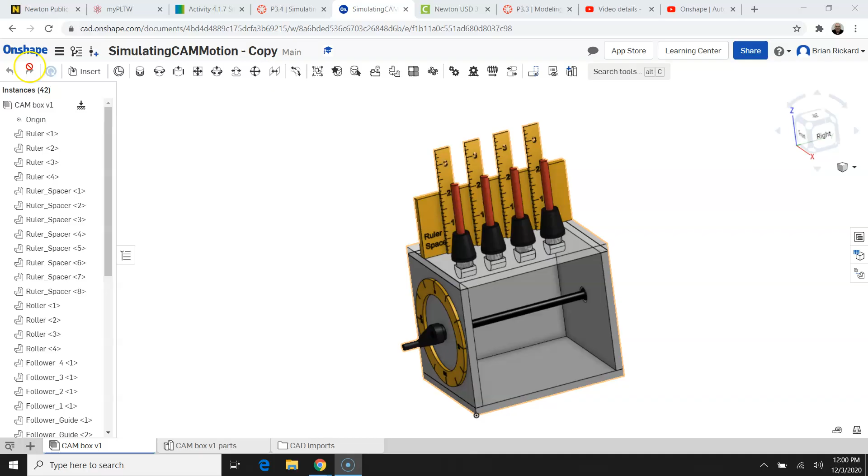How to import your cams into the Automata assembly. So we have our Automata box here.

If we just go to Insert, and then click on Other Documents, and go find the parametric cams that you created, they should pop up, and you can go ahead and find those and insert them into the document.

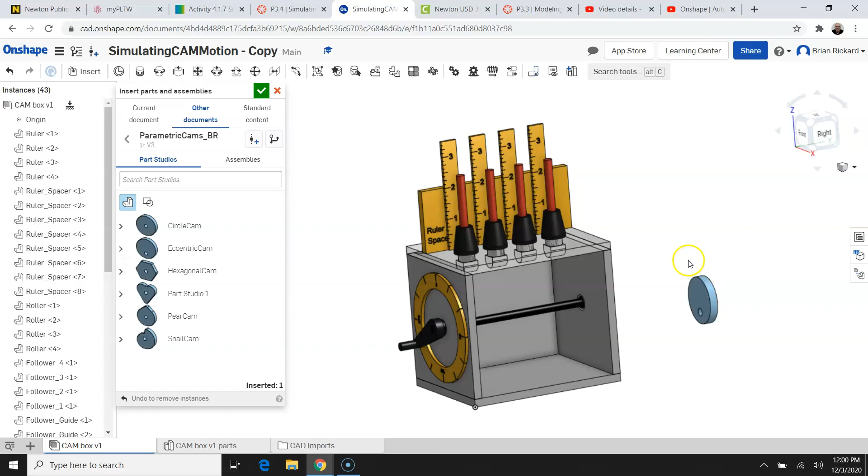So once you have your cam inserted into the document, we're going to want to put it on the axle so we can do some testing with this setup here for our Automata box.

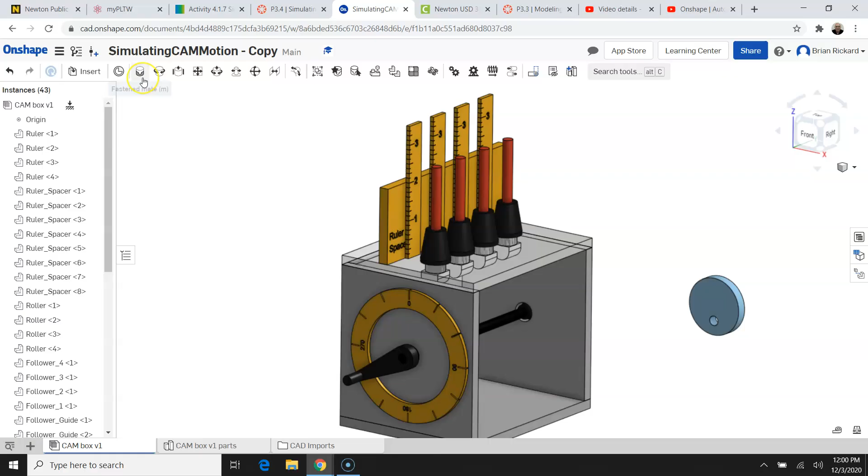So the first thing we're going to want to do is fasten our cam to the axle. So I'll go ahead and get a fasten mate. I'm going to select the circle that represents the hole on my cam, and I'm going to come over here to the axle and select the actual axle.

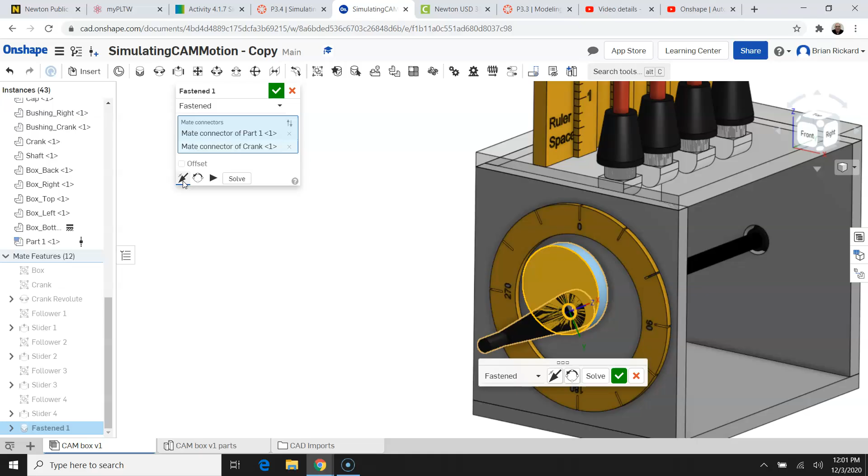Now depending on how your cam comes in, you might need to reverse the direction. Mine came in correctly. Now we're going to need to offset that cam so that it goes right below this follower guide and follower rod.

So I'll click offset, and I'm going to offset that negative 1.25 inches in the Z direction. You can see that it moves the cam directly underneath the follower, which is what we want.

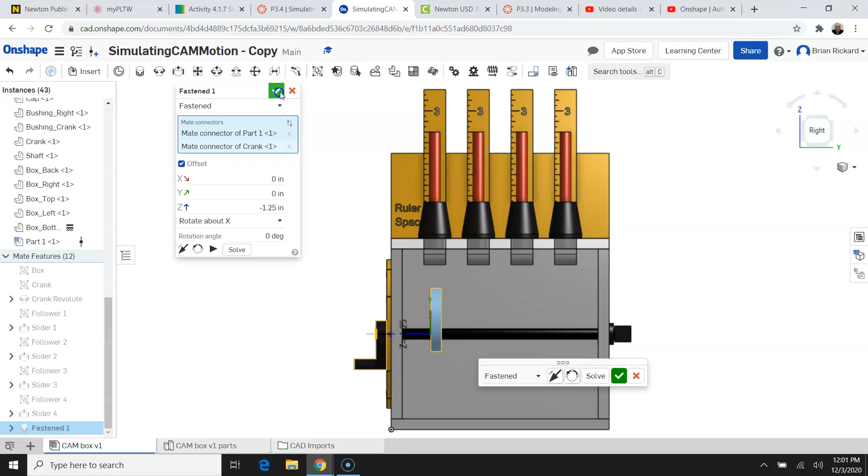The next step is to go ahead and attach the follower guide to the cam so that when we spin the crank, our follower is connected to the cam. And to do that, we're going to use a tangent constraint. Up here is the tangent mate.

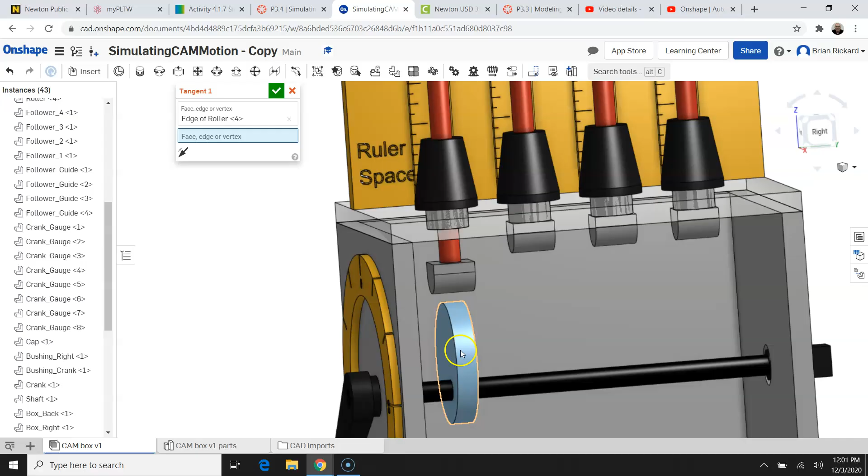I'll go ahead and click that. I'm going to click the outside edge of the roller, and then I'm going to click the surface of the cam. When I do that, it makes those two, the edge tangent to that surface.

So then when I spin my cam, or spin my crank, I can see how the cam moves within the box. So I want to show you one of the cams with sharp edges instead of smooth edges.

So we're going to look at the hexagon cam. I'll go ahead and click to insert another document. I'm going to go to my Onshape and find my parametric cams.

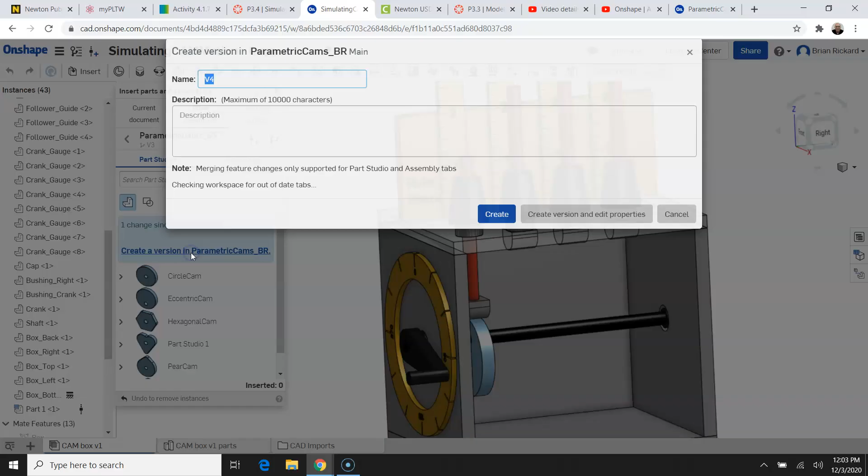If you notice, there's a version change, and you might have already had to do this. So what you're doing is just creating a new version of your parametric cam document, which is totally fine. The old versions will still be there. So you just click Create to create that.

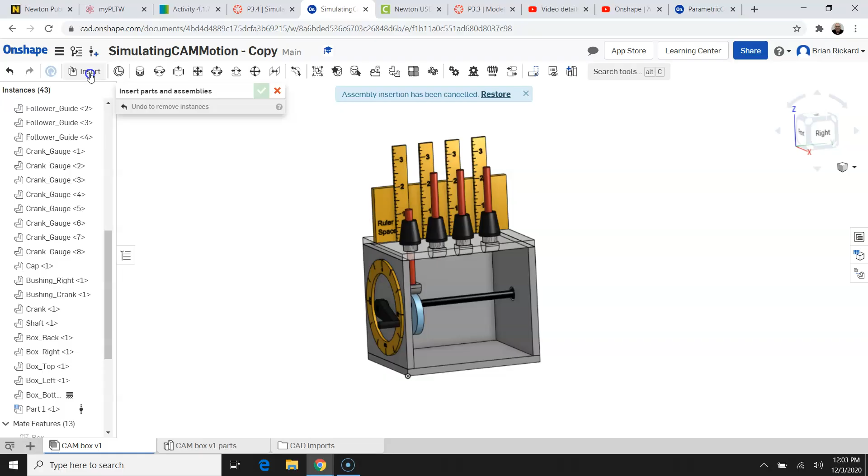And then I'll come in and I'm going to insert my hexagon cam. So let's do that again. When I get that cam input into my design...

One of the shortfalls of Onshape is that the geometry of a tangent won't follow this sharp edge on the follower rod. So you'll have to edit this cam, and I'm going to show you how to do that.

If you come into your cam design and just put a fillet on each of those edges, you can make it like an 1/8 of an inch fillet and just round over those corners.

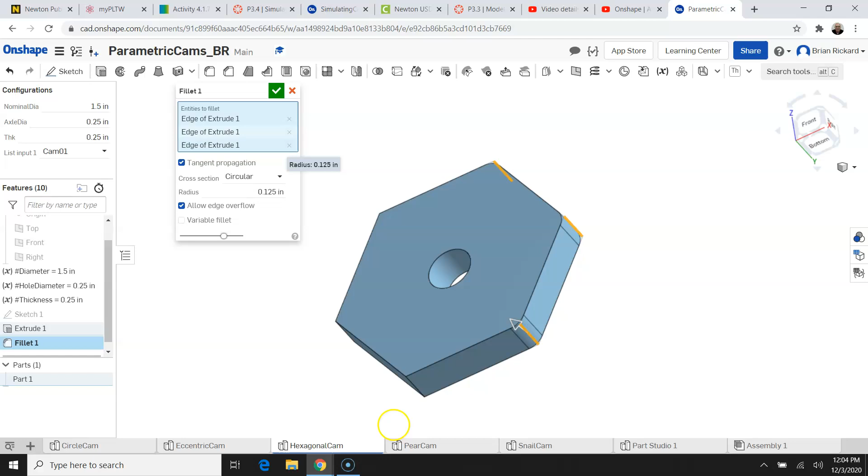Then we'll be able to use that tangent constraint to fix our cam to the follower rod.

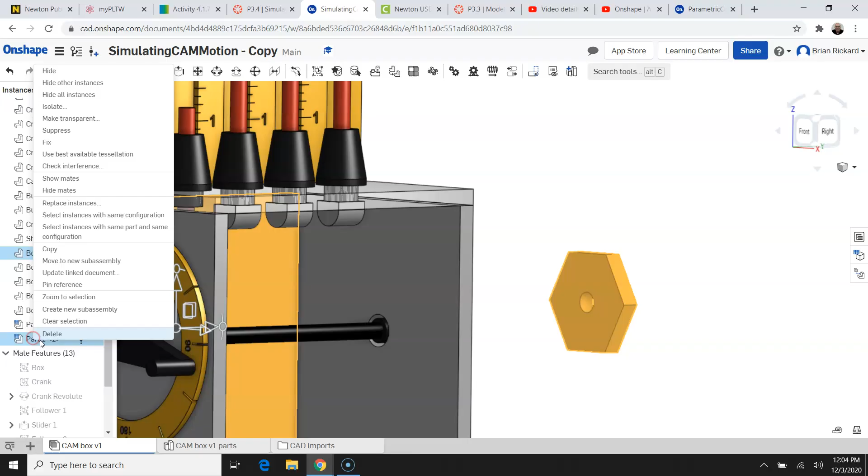So you just do that in your other document, come back into your Onshape document. You can find the one with the square edges if you've already put that in, and delete that. We don't need that anymore.

And then you can insert the new cam. Again, it's going to say you have a new version, so click to update it, create the new version, and then import your new hexagon cam.

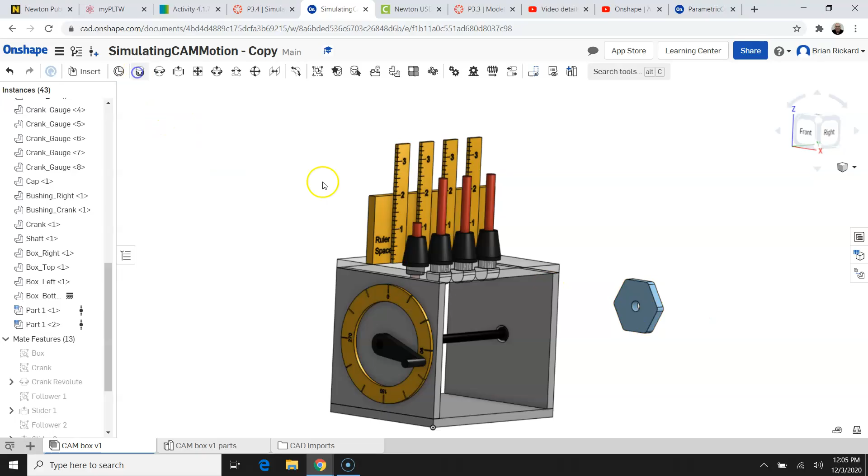And you can use the same method for putting that into the assembly. So I'll check the outside edge of the hole, the outside of the axle, and I'll offset it this time 2 1/4 inches.

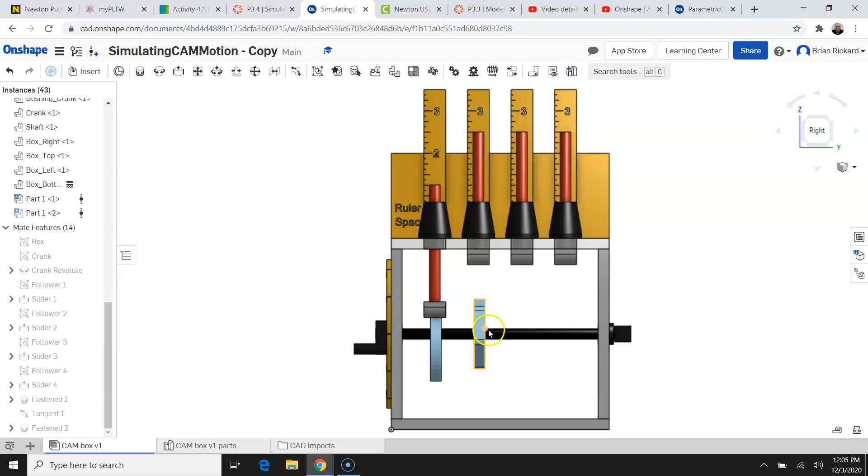So each one of these shaft followers is there another inch. So this is 1 1/4, 2 1/4, 3 1/4, 4 1/4, and that'll get you to the center.

Then it's the same process. Simply use a tangent constraint, select the edge, select the surface of the cam, finish it, and then you should be able to see how your cam reacts.

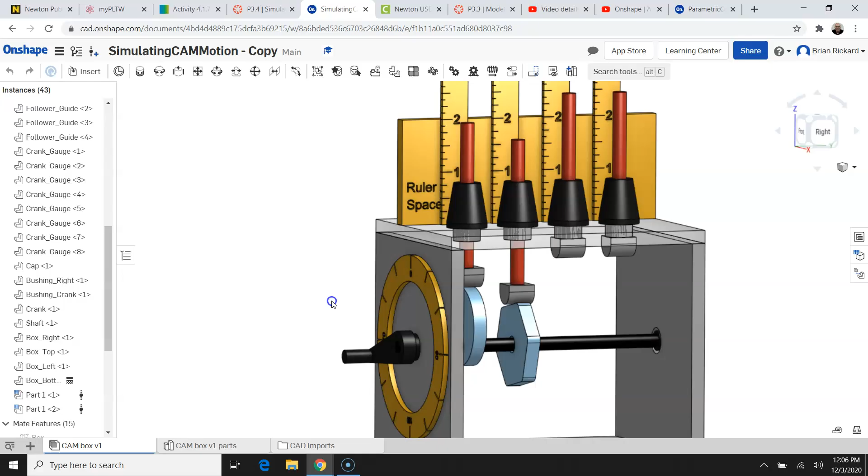We'll be creating some motion graphs, and that's why these rulers are attached. So you will do this for all 5 of your cams. I know there's only 4 spots in there. You'll simply have to take one of the cams out and insert the new one in its place.

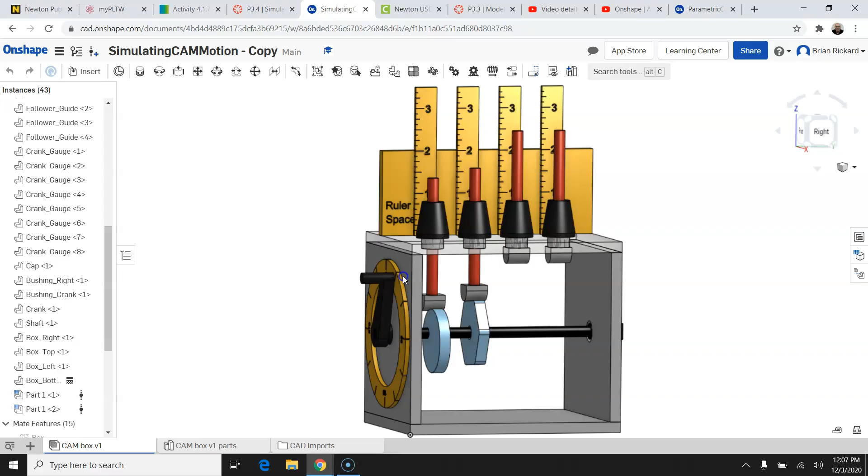And so we will create a motion graph where we graph the displacement of the follower rod every 30 degrees. All right, and so that'll be the next step in our process.